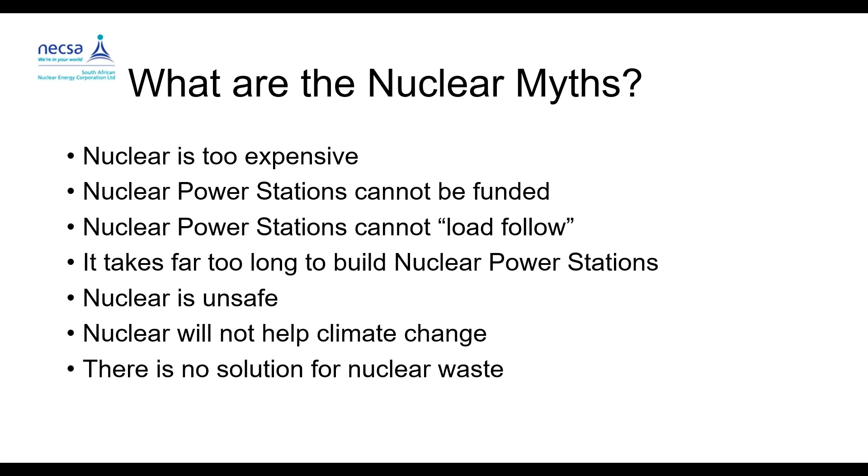So the first one I always quote is nuclear is too expensive. The second one, which goes with the first one, is that nuclear can't be funded. The third one is that nuclear power stations cannot load follow, that they're only base load machines and they make power and nothing else. The next one is it takes far too long to build them. And then, just for good luck, nuclear is unsafe. It won't help climate change, and there is no solution for nuclear waste. I think I've covered the majority, and I'm sure there's some more myths, and I'll happily analyze them in question and answer. Let's start off with nuclear is too expensive.

And all my presentations are made of slides, largely of information I'm quoting. So this is an interesting analysis. This was done for the Financial Times in the UK in 2019, still valid today. And it quotes the cost of nuclear plants. They did an analysis of nuclear plants; there were 34 actually delivered nuclear projects around the world.

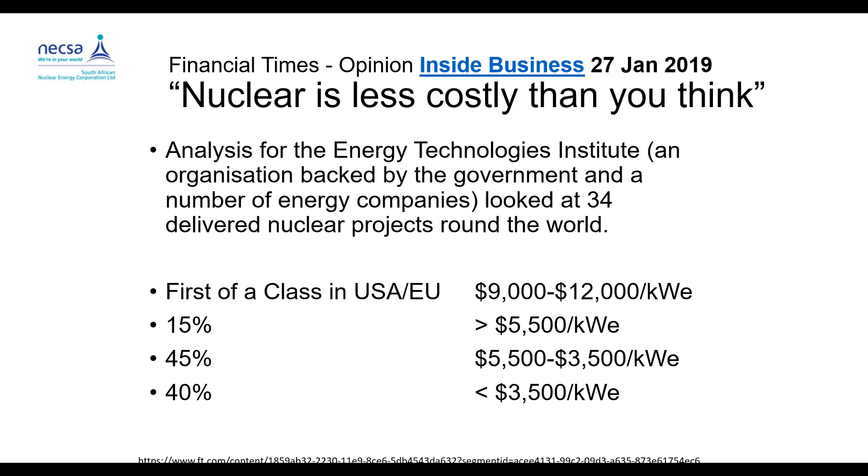And they came to the conclusion that a first of a class nuclear plant in the USA or Europe can cost $9,000 to $12,000. I'd argue that's even low given some of the problems they've got in the first world now. But in reality, only 15% of nuclear plants cost more than $5,500 a kilowatt. 45% were between $5,500 and $3,500, and 40% are below $3,500 a kilowatt. I'll explain these numbers a bit later as I go on. I'm going to be quite quick in this presentation.

This is an interesting graph to explain why nuclear power can be misquoted. This is US data, in fact, from a Westinghouse presentation in 2003, but it's valid. The capital cost of existing US nuclear plants in the year they were commissioned and what their costs are. And the nice thing about the US is they keep lots of good records. So here you can see the 100 and something nuclear reactors the US has built, starting in the mid-60s, going through to the mid-80s when the previous building boom stopped.

What's interesting is that these are the same regulator, in other words, the US NRC, the same technology, in other words, they're all water-cooled reactors, and the same industry, the same players. But what you can see is the ratio between the most cost-effective one delivered and the most expensive one is 5 to 1. And that tells you that project management is the key issue in building nuclear plants. So I will say, absolutely, nuclear plants, if you don't know how to do it, can become horribly expensive horribly quickly. And any nuclear project has to be based upon a team that knows what they're doing.

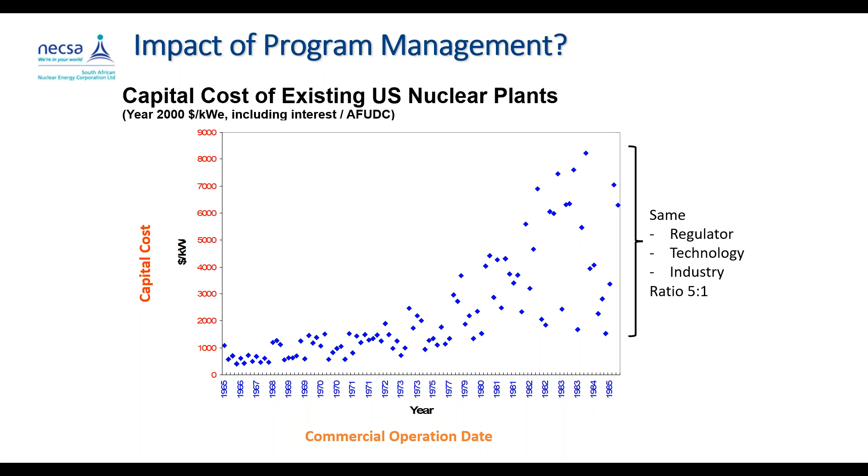If we look at a more recent example, for those who don't know it, the United Arab Emirates ordered 4 reactors. And I'm sorry, this slide is in Norwegian. I apologize for the language, but I'm not Norwegian. But it's pretty obvious what it says. They built 4 reactors in Barakah, which is in the UAE, on a turnkey contract. And this is analysis of the cost of building them.

And what's interesting is these are the OPR 1000, that's 1,000 megawatt machines, and that's the cost for Korean reactors, Shin Kori 1, 2, 3, and 4. Then they built what's called the APR 1400 megawatt reactors, Shin Hanul 1 and Shin Hanul 2, actually built in Korea, where they've got the background and the industry.

But what's interesting is the ones built in the UAE, the export machines: the first one cost the best part of $6,000 a kilowatt. The second one fell to about 5,000, and the fourth one of the series was down to being very close to the price in Korea. So the first answer on nuclear costs is you've got to look at nuclear costs and ask, are you building a first of a class? Bring in a good vendor.

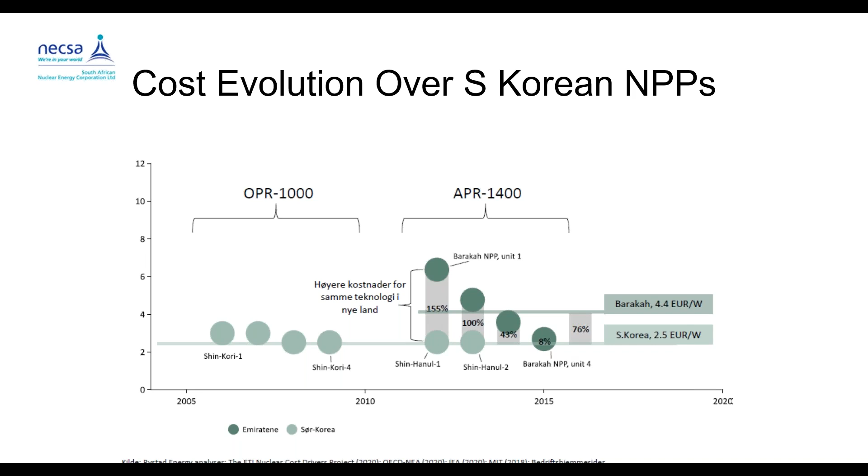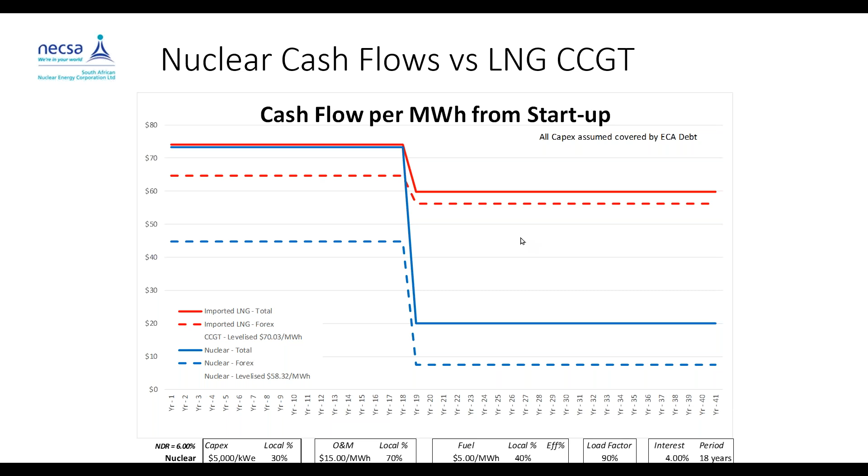What's interesting is that for the first 18 years, while you're paying the debt off, the actual cash flow for the nuclear and for the natural gas is almost the same. The foreign exchange is the dotted line, so you can see the foreign exchange for the nuclear plant is less than the natural gas plant, because the natural gas plant is importing LNG, and then at 18 years it falls away nicely, which explains why Koeberg is now sitting as a really cost-effective plant for the South African grid. So that's the first one.

I've just gone through very quickly, and I can come back in questions. But you clearly can't get the money. Well, maybe you can. The Egyptians are building 4 nuclear units, 1,200 megawatts each. That's 4,800 megawatts the block. They're also including in that a full desalination plant to provide desalinated water, the capacity of which is probably about twice what we use in the Western Cape.

What's interesting is that the Russians have loaned them $25 billion to do this, and they are quoting an interest rate of 3% annually. Now, this is nominal interest rate in dollars. US inflation is about 2% over the last 10 years, if you ignore the recent crisis, which means that the actual value that the Egyptians are paying is 1% real. And of interest, Standard & Poor's rates Egypt as worse than us in terms of credit rating. So that's straightforward.

What's interesting is you only start repaying this debt when the plant starts up. In other words, you can see that the loan will be used by the Egyptian side 13 years between 2016 and 2028 as they construct the plant, and they'll start repaying it only in 2028 over 22 years. Quite interesting little discussion.

This, by the way, is a statement. I use this as an example because it's actually issued as a press statement by the Egyptian government, not some vague understanding. So yes, you can raise money, and in fact, every single nuclear export plant in the world is funded this way, with the exception, oddly enough, of the UAE job because they paid cash because they're an oil country in the Middle East.

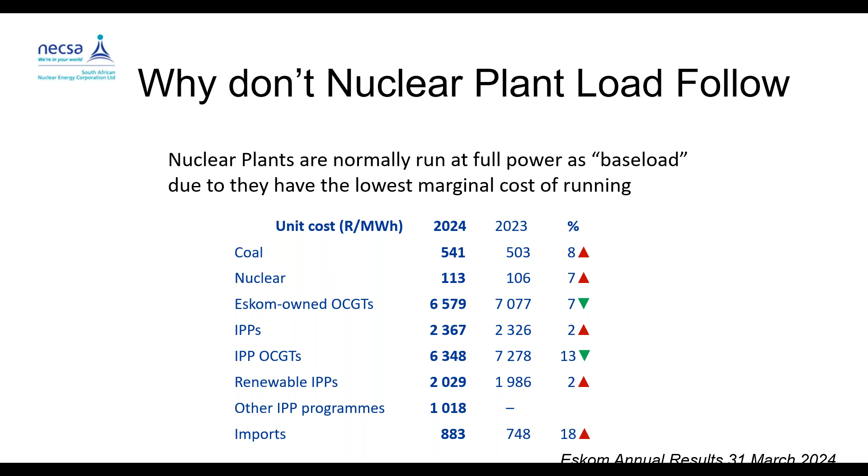A coal station has about 3% per minute. In other words, all Eskom's coal stations can theoretically change load slower than Koeberg can. And of interest, at the bottom end of the range on an Eskom coal station, you have a limit. You have to put oil in the boiler to keep the boiler up. Koeberg, in theory, can go down to about 20% power, but we wouldn't do that. And gas turbines are equally not exactly maneuverable.

So here's an interesting question: nuclear can change load faster than a combined cycle gas turbine or a coal station. And you may ask, why is this? The answer is submarines. This is a bit of history for you. That's a Swiftsure class submarine. I used to serve on one of those. I was ex-British Navy.

Nuclear submarines are designed to change load dramatically. In fact, we could change load at amazing rates, sort of 50% a minute. And that's the basic technology we're now looking at. So the idea that you can't make PWR technology, which is classical, load follow is not reasonable. You just don't want to because it's too expensive.

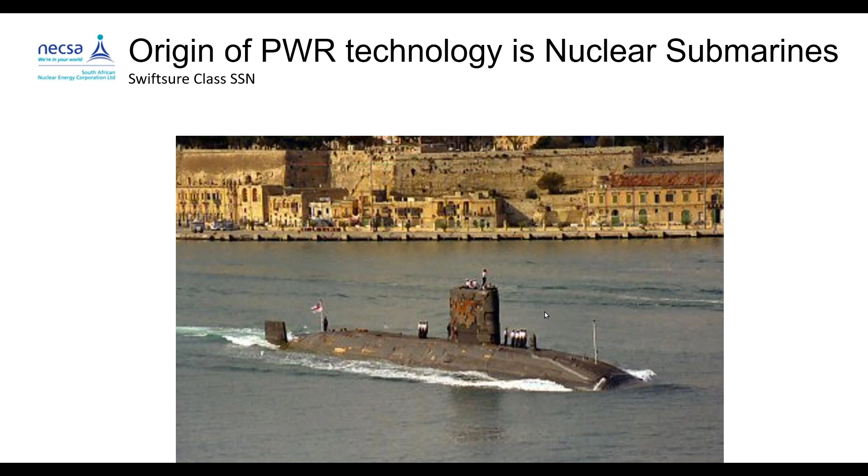The next one, and I'm going through reasonably quickly to give time for comments, is: but they take far too long to build a nuclear power station, there's no point going there, it takes decades. So again, a bit of world experience for you. This is France, real experience. The French decided in 1973, at the point of the oil crisis, to go nuclear in a big way.

This is the graph of their actual production of power from the World Bank, which shows that between 79 and 88 they went from 55% fossil fuels to 9.5% fossil fuels, which indicates they can change quite quickly. This is the result of a build program in a country that wasn't previously building many nuclear plants. They brought the first water-cooled reactor on in 73, and that's the result they achieved.

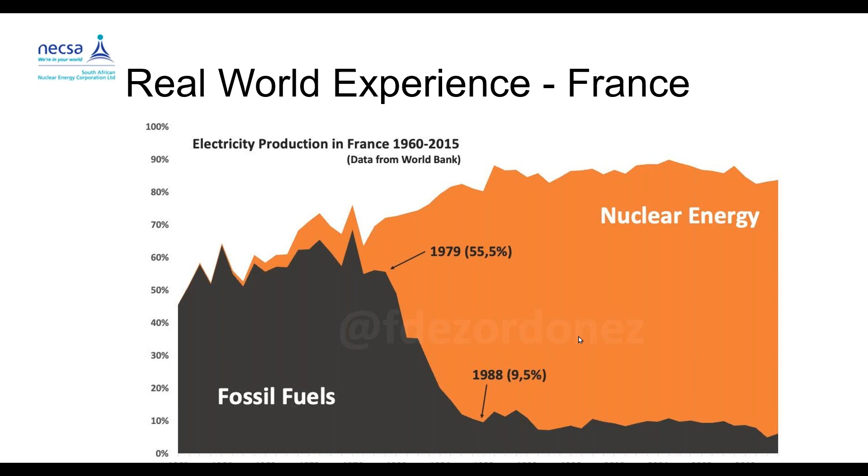So that's quite fast. This is a bit of a complicated graph, and I'll explain. This is an analysis of the BP Statistical World Review, about 2020, but it doesn't matter, of what was the deployment on a per capita basis of megawatt hours by different technologies in different countries. So the best ever was Norway at the bottom, hydro, and they had 0.8 megawatt hour per capita annual average yearly from 1980 by building hydro dams.

The next is Sweden's nuclear program, 76 to 86. The next is France's nuclear program. The next is Finland's nuclear program. The next is Canadian hydro, Belgium nuclear, all the way up, and then you start getting into the wind ones. The Sweden wind is what, 0.2.

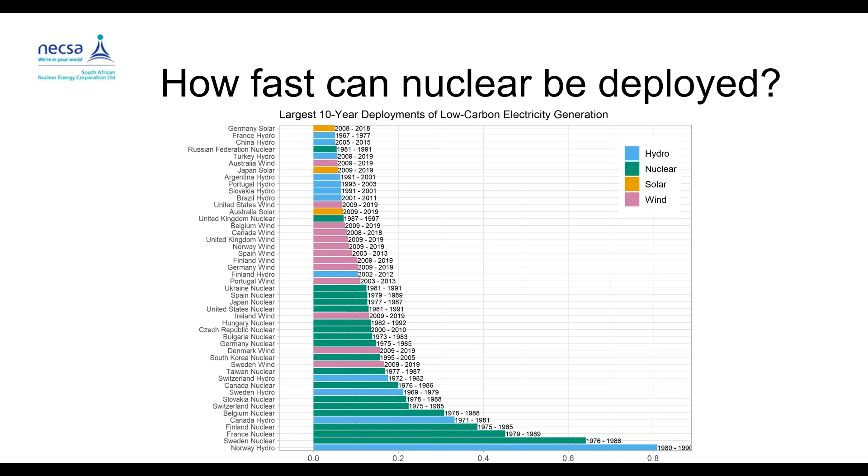So essentially on actual world data, if we seriously want to move this country to a low carbon environment, it is pretty much that nuclear is historically the fastest way, unless we can build a large dam. And I will comment to you, I would love to move the Grand Inga Dam from the Congo to the Free State. I'm not sure we can do that. So if you can't do that, the quickest way of getting power transfer to low carbon is to actually go with nuclear.

This of interest is just the construction dates of the Chinese nuclear plants, and each black dot is a Chinese nuclear plant. The funny colored dots of interest, those dots up there, that actually is the construction of the AP1000 and EPR. That's French and American reactors built in China. And as you can see, they had problems because the French and the Americans had not finished the design before

they started building. The other funny one up here is in fact the high temperature gas cooled reactor, which is a PBMR type reactor, and it took a long time because it really is an absolute first of a class reactor in the world. But the main dots are the main light water reactors, Koeberg type reactors. These two here are actually in Pakistan. They're export machines, and these machines are other Pakistani reactors.

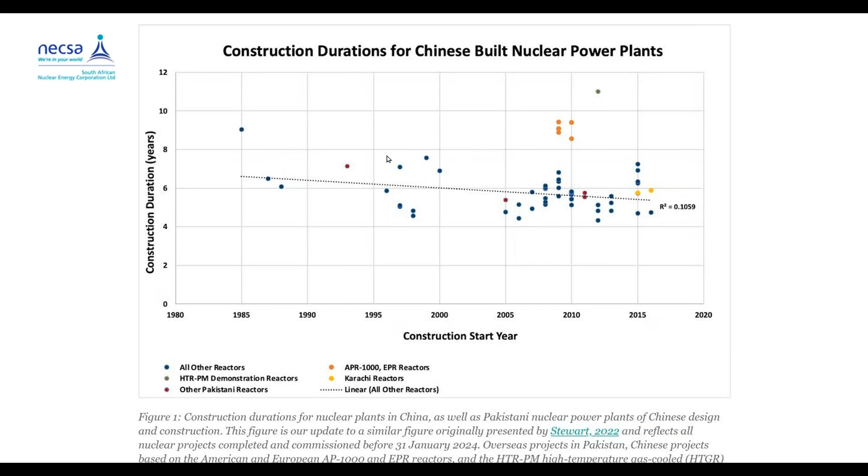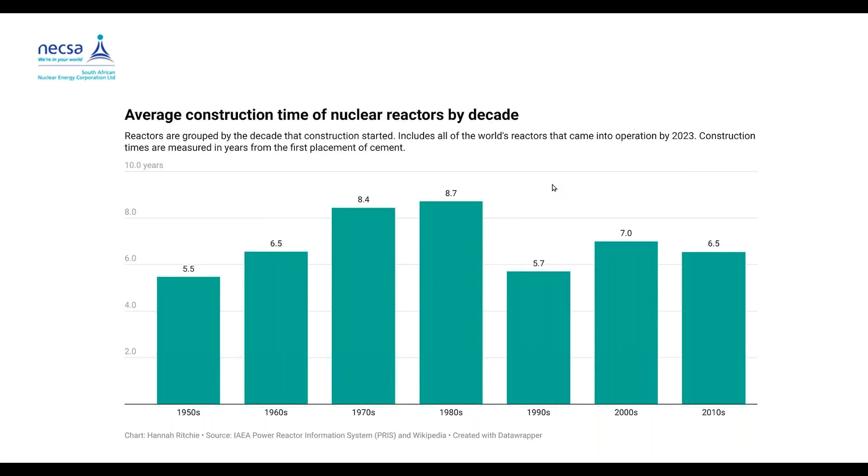So what you can see is we're coming out at a figure, probably a good trend line would tell us at about 5 years from pouring concrete to making power. This is the average over the years. What's interesting is the average construction time peaked in the 1980s, largely driven by US reactors that hit all kinds of regulatory things. But in general, 5 years or so seems a reasonable number for building. And again, the 5 years is for when you start pouring concrete. Clearly there was work before that in terms of getting ready for it.

But clearly we all know that nuclear is unsafe. We've been told that enough times by everybody. So I will try and just do that one quickly. This is the mortality rate. This is, I think, about a late 90s document. It's still valid. And that's from the World Health Organization and other people. Your average coal station in the world kills about 161 people per 10 to the 9 kilowatt hours. China's pretty bad. America's better. Oil is 36. Natural gas is 4. Biomass is 24.

Solar rooftop is 0.44, which is higher than wind. And the reason it's high, by the way, is simply because somebody worked out that rooftop solar requires guys to be on roofs to install it, and someone did the analysis of exactly how many guys fall off the roofs in the States and kill themselves every year, and they put that back into how many hours people spend on the solar rooftop and worked out the death toll.

And you can see nuclear is down at 0.04. I'll give you a different one a bit later on. What's interesting is that includes Chernobyl and Fukushima in that death toll. We've been running nuclear plants for about 70 years now, so it's not like it's going to hit us sometime soon.

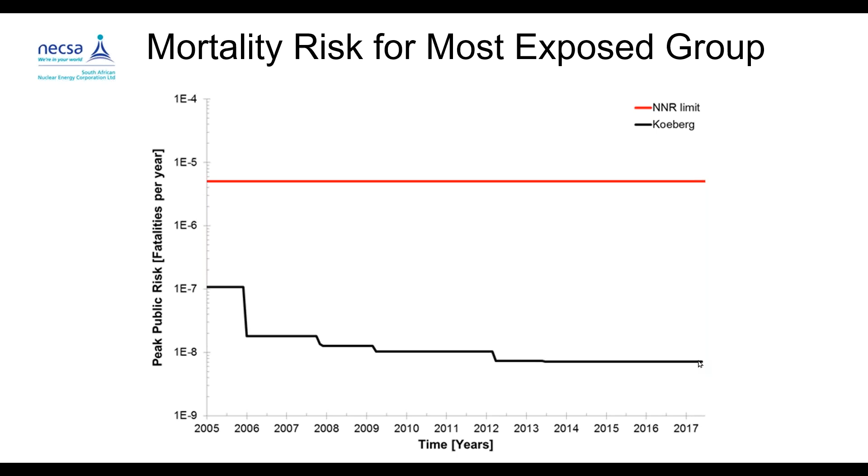The actual Koeberg data, which is from the analysis the NNR accepts, put us at about 1 every 100 million years. And I'll just put a comment to you, that actually is comparable to a meteorite wiping out Earth, as in end of all life on Earth. So I think we're not too badly off.

And lastly, there's a graph before I move on to the next thing. This is the loss of life due to nuclear power, in terms of life expectancy going down in years, versus fossil fuels. You can see that there's a very small impact in Chernobyl. They reckon less than 1 year for the small area around Chernobyl, less than 0.1 year, that's 1 month, for the area immediately around Fukushima. I don't debate that.

This is China's industrial zone, India's industrial zone, and the rest of the world. Looks like there is no comparison. If you want to be healthy, live near an ex-nuclear station. I think we can see that from living in Cape Town versus living on the Highveld.

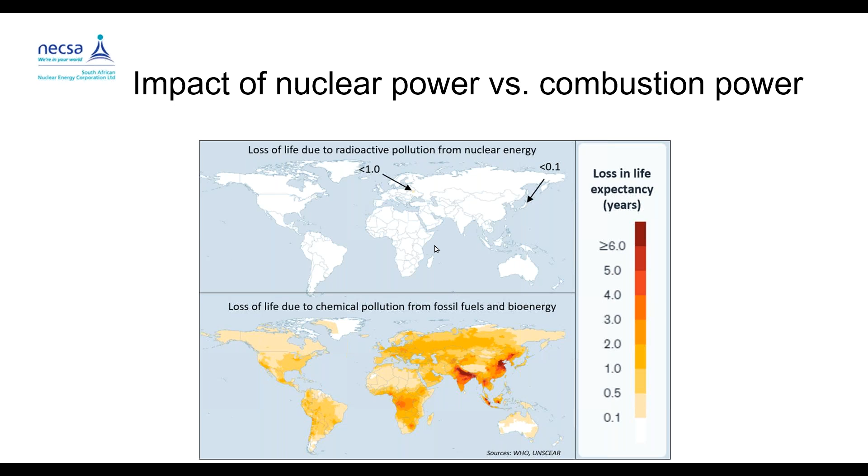Next claim made is that nuclear will not help climate change, because clearly nuclear is a climate change problem. Well, this is the UN Economic Commission for Europe. They analysed life cycle greenhouse gas emissions across all technologies, and

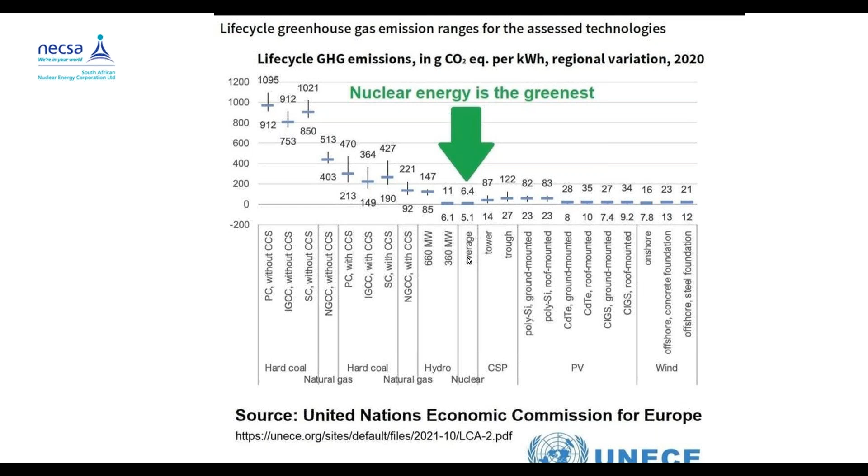shock. The nuclear is averaging 5.1, which is the lowest of any technology. Lower than renewables, lower than PV, lower than CSP, clearly way lower than coal. So if you want to get rid of climate change, you go nuclear, and it's better even than hydro, which has some issues in terms of methane.

Just if you look at how well countries have done when they tried to go climate green, this is an interesting chart. I'll explain it to you. This basically is the European Union from 2020 to 2021. The numbers haven't changed. Each color is a different country. Each dot is for a 1 hour period, in terms of how many megawatt hours was made in that hour and what was the CO2 emission in that hour.

And what you can see, this big one here is Germany. Does get quite good occasionally, but normally it's up here. Here is Poland, because that's very much like ourselves. That's burning coal almost exclusively. Italy, Spain, UK, combination of all things: bit of hydro, bit of wind, bit of solar, bit of nuclear. This is France, which you can see is looking pretty good.

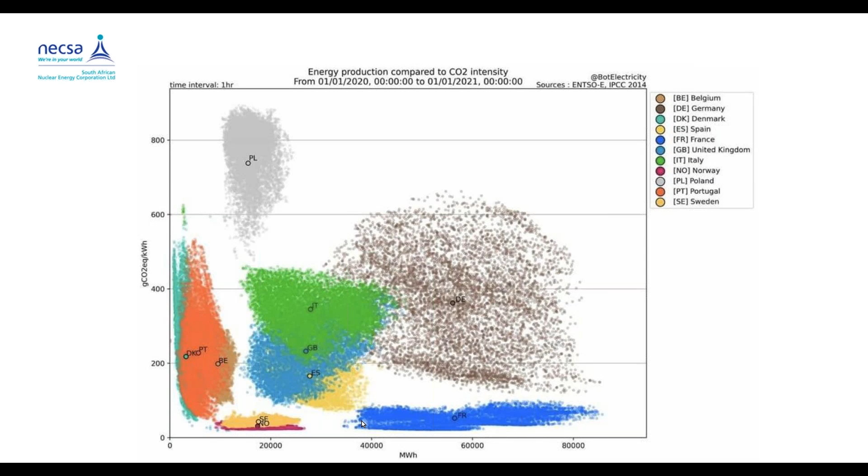There is Sweden and Norway, which are massively hydro and nuclear. That's what the Swedes have got, is nuclear and hydro, and Norway is pure hydro. And then you've got Belgium. So what you can see is the country that tried to do it, this solution, which is the German solution, doesn't actually work. This solution, which is the French solution, maybe it does.

And then lastly, just in this section, there were 7 big grids that have actually decarbonized, and they've all done it with nuclear and hydro. There is no decarbonized system in the world running on renewables. Nice idea, we may get there eventually, but certainly there's no history to support it.

Okay, and the last thing, not quite last thing, almost: we all know that there is no solution for nuclear waste. We've been told that 1,000 times. Well, let's look at nuclear waste a second. This is the South African disposal site at Vaalputs for all the waste from Koeberg and Pelindaba for what's called low-level waste. This basically is the waste that is clothing and contaminated items, but very limited.

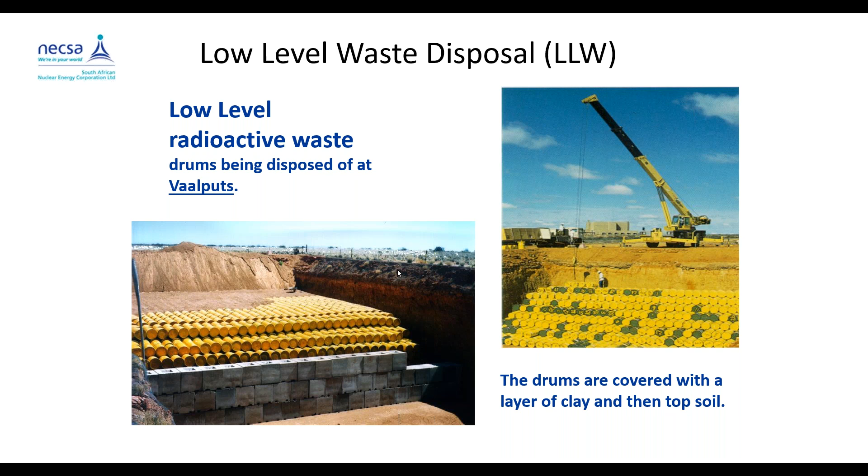The activity has a half-life of maximum about 30 years, strontium and cobalt. And so in about 300 years, this will decay away completely to the background. That's low-level waste. You've got intermediate-level waste. The difference is this is process waste from the nuclear plant. In these concrete drums, we mix the waste with concrete, so in the middle of that drum there is a slug of concrete mixed with nuclear waste. Again, same sort of half-life, slightly more activity.

But the real problem is clearly the spent fuel, which everyone knows we haven't got a solution for. Well, maybe we have. This is the spent fuel pools at Koeberg or somewhere. Fuel comes out of Koeberg, is put in the spent fuel pools. We then, and we're doing it at Koeberg now, take the fuel out of the racks and put it in dry storage casks.

And there's a little lady standing next to a dry storage cask. The cask weighs about 130 tons, contains normally about 24, 28 fuel assemblies, and you stack them here, the interim store at some US plant, just stacked them in the same at Koeberg now, and they can stay there comfortably with almost no cost involvement, the present analysis showing well over 100 years.

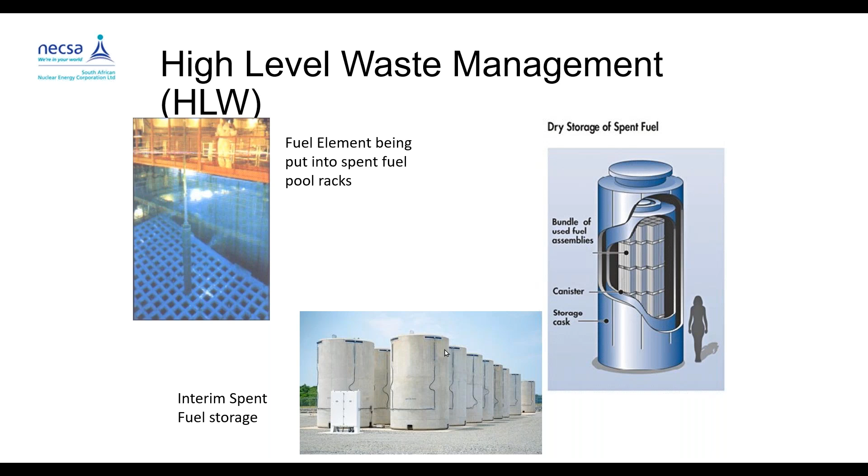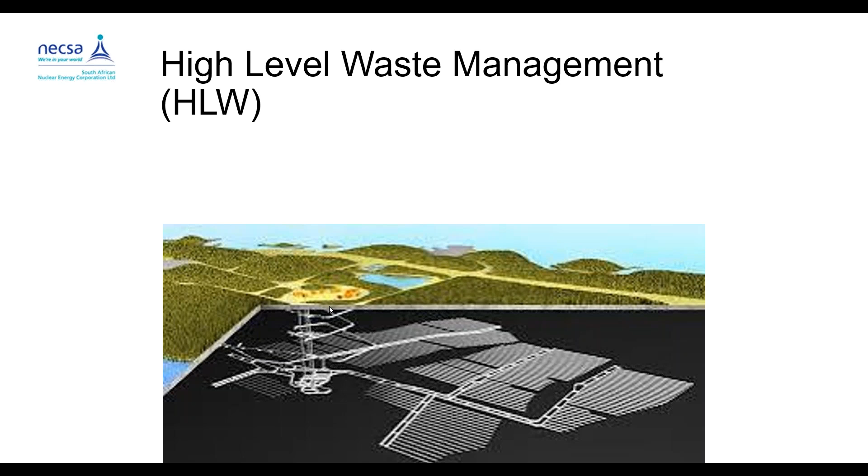What do you do with it then? Well, you then dig a hole in the ground and you bury it underground, about 500 meters underground. That is well established. Why haven't we done it? Because it's expensive and there's no need to do it. But these are the projects in the world to do that. The most advanced one is Posiva in Finland, and they are literally commissioning it as we speak. They are starting to finally dispose of nuclear waste there.

There are other countries, France, Russia, Sweden, and so on, which are going forward in the same way. There is no problem, we know how to do it. It is funded. Eskom has put money aside for it, or has put a provision aside for it. So has NECSA. There is no problem in disposing of spent fuel.

The other question often raised is, but what about decommissioning? And decommissioning costs we can quote forever. I just pulled the NRC out because they've done more of it. The NRC has quoted in their 2022 document that there are many factors that affect reactor decommissioning costs. Generally, costs range from $300 to $400 million. Sounds like a lot of money.

Given the replacement cost of 1,000 megawatt nuclear reactors in the order of $5 billion, this is less than 10% of the construction cost, because the US reactors are about 1,000 megawatts. For the sake of economic evaluation, I think 15% will be used. This is the way it's done in Koeberg, and it's generally in line with the percentage used in the Koeberg decommissioning provision, and it's used in the OECD NEA reports. I won't go into the details of that.

So what does 15% add to the cost of the reactor? Well, I mentioned discount rates earlier, and this is just if I put money aside in an investment fund at the beginning of life of 60 years to decommission the plant at the end of life. Clearly, if I get a net discount rate of 0, I need 15% of the capital cost. But if you start talking about, let's say, 3%, 4% discount rate, which is very conservative, it's a 2% impact on the capex of the plant.

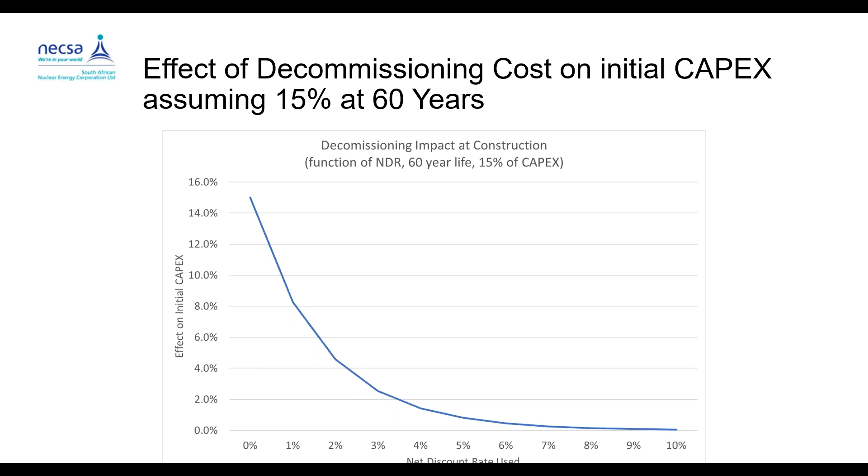What is true is that virtually all the nuclear reactors on Earth currently operate and put decommissioning funds away as they operate. Koeberg does that as a provision in the Eskom books. In the Eskom books, you'll find it. And what's really interesting in the Koeberg books is that Koeberg's now had life extension, so its decommissioning provision assumed decommissioning this year. So if we're now decommissioning in 20 years' time, that then means they can claim some money back from that decommissioning fund because it's only going to be used in 20 years' time.

I apologize for my dogs in the background.